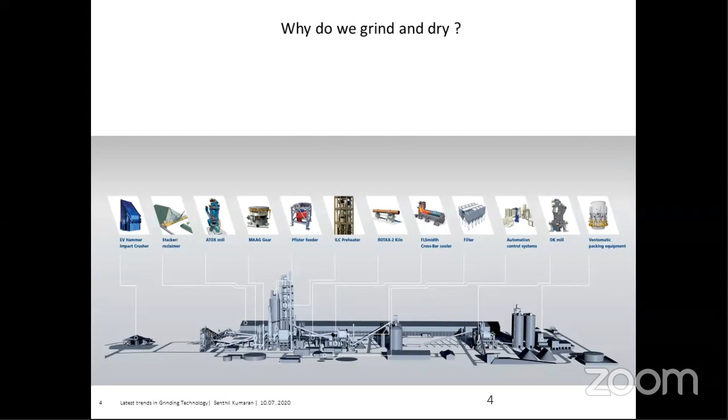When we want to optimize fuel consumption, we have to increase the surface area so that the process completes easily without much issues. To make perfect cement, we have to optimize our cost in terms of fuel consumption as well as power consumption.

That's the main reason why we are grinding and drying. Also for a streamlined process, these are all continuous processes. The feed should be homogenized and uniform enough so that fuel and power variations are streamlined. So to optimize that, we need to grind and dry it, for better heat transfer in the pyro system.

When we see the power split in the cement plant, only 33% of the power is spent in the pyro operation, 2% in the packing plant, and 2% for crushing. The major 63% is due to grinding.

That's why the grinding operation is so important, that we have to optimize it and choose a proper solution for the grinding.

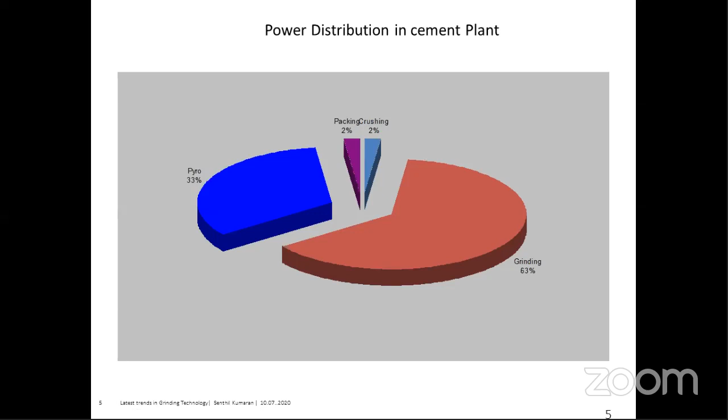When we see the crushing size reduction, it reduces the size from above 1 meter of rock up to 25 to 100 mm, but the power consumption is only 0.2 to 1 kilowatt hour per metric ton.

For raw grinding, the size reduction is 25 mm particle reduced to 85% less than 90 micron, with energy consumption around less than 20 kilowatt hour per metric ton. In finish grinding, the same 25 mm clinker is reduced to 95% less than 45 micron, where the power consumption is 26 to 45 kilowatt hour per metric ton.

Even though crushing reduces the major size band, from 1000 mm to 25 mm, the power consumption is less. But when we go to raw grinding, it consumes more power, and in finish grinding it consumes even more power.

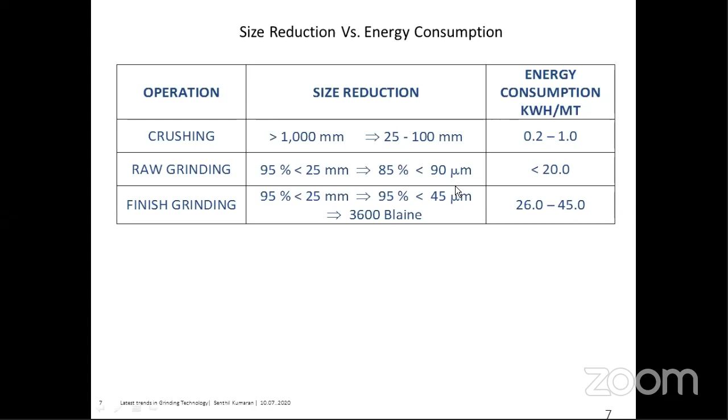When we see the principles of size reduction, they are impact, compression, attrition, and shear. These are the major four principles of size reduction.

With impact, it is a quick sharp blow which causes the stone to shatter. This is a typical industrial crusher, it works on the same principle. This particular piece of equipment is called single rotor blow bar crusher.

This works on the principle where it rotates at very high speed and passes the material. Above this there will be the impactors - the blow bars hit the material and it hits the impactor, reducing the size. Below this is called the grizzly bars, and based on this setting, the size reduces. So this is impact.

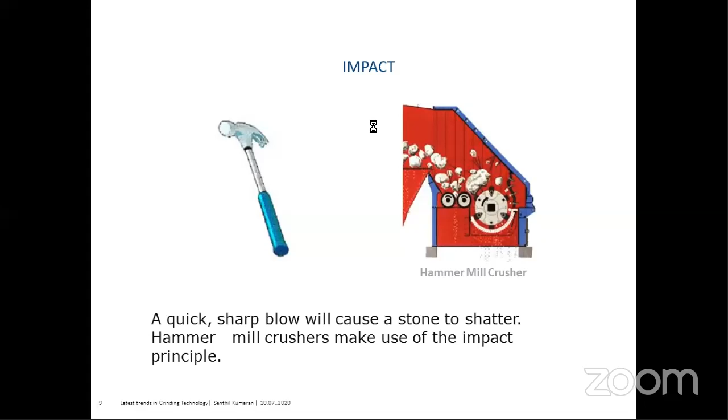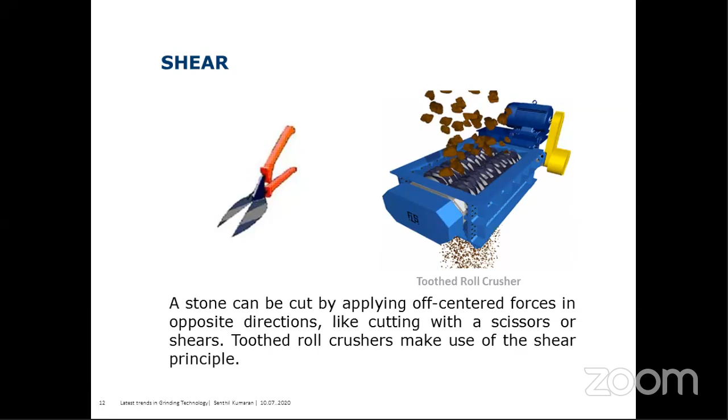Then the shear forces: stone can be cut by applying off-center forces in opposite directions. These two rollers with the sizing teeth rotate in opposite directions, acting like a crusher, like scissors or shears. So this toothed roll crusher makes use of the shear principle.

So in compression and impact, the wear and energy consumption will be lower, whereas in attrition the wear and energy consumption will be higher, because with impact the fineness cannot be achieved, but with attrition the fines can be achieved.

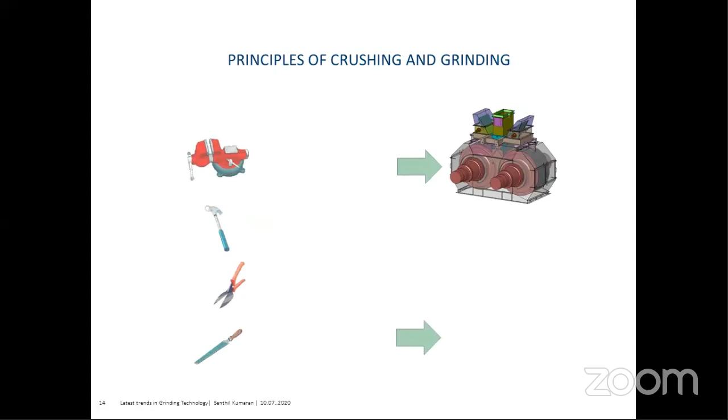So we'll see about three major equipments, or the three major machineries for grinding today. First is ball mill, then we'll discuss the vertical roller mill, and then the roller press. So at the top, this is the roller press.

You can see someone raised a hand. Yes, Mr. Vijay R. Hello. Hello. Am I audible? Yeah, you're audible. Yeah, I see someone has raised a hand. They may not be knowing, I think. Okay, shall I proceed? Yeah, you can proceed. Okay, fine.

So the common grinding machines in a cement plant, we'll see about these three: ball mill, vertical roller mill, and the hydraulic roller press. So we'll see about these three machines.

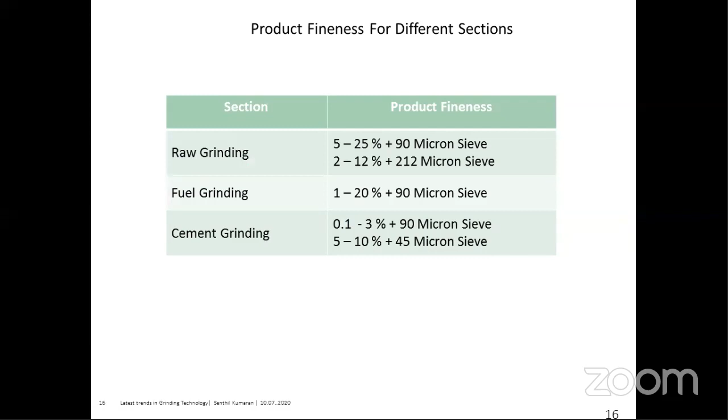So the grinding process: the first compartment grinds by impact, using higher size grinding media like 90, 80, 70, 60mm. These balls impact and break the particles by falling. The ball mill rotates, lifting the balls up to some level, and the lifted ball falls on the material, impacting and reducing its size. After some size reduction, it passes to the second compartment, where efficient grinding is done by attrition. The small size media, like 25 to 15mm, rub along with each other, and the material passes through attrition. This ultra fine or fine grinding occurs and grinds the material into a finer product.

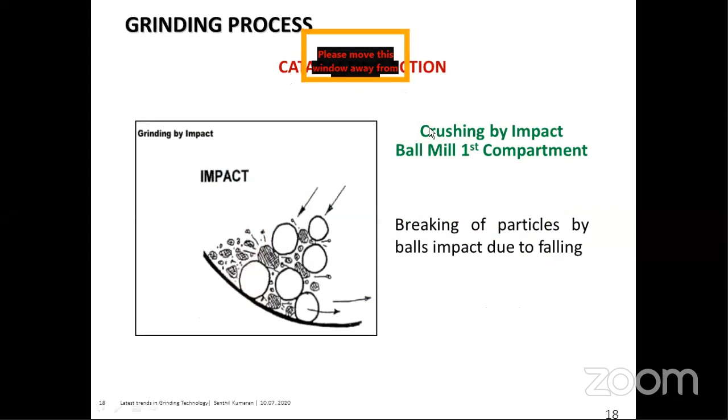So the energy transmitted in the balls is based on mass, ball sizes and specific weight, speed, movement, mill speed, filling, and liners. These are the major factors which will affect the grinding process.

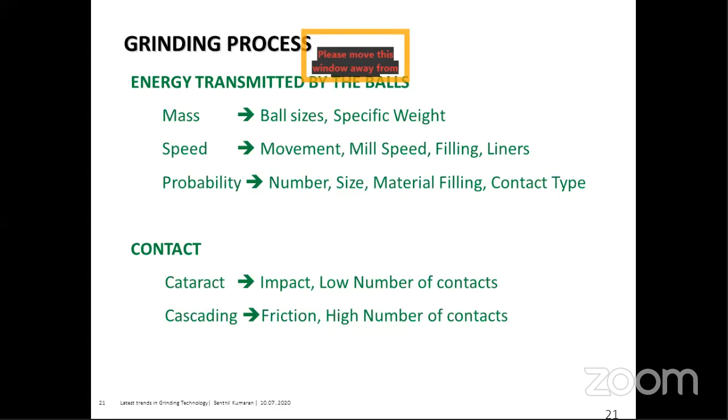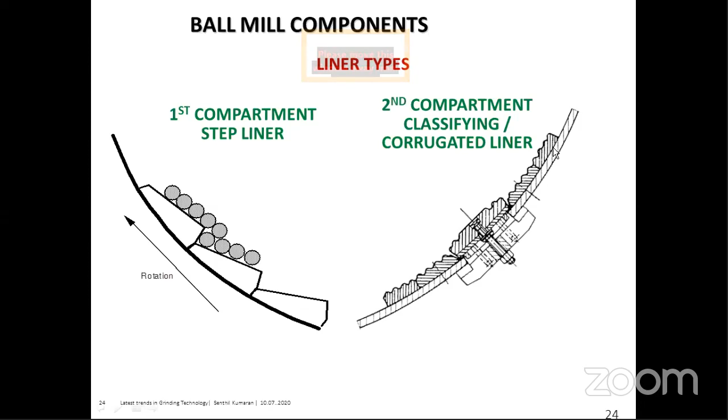So this is a typical ball mill, which we have seen already. This is the liner. The first compartment liners will be like stepped ones, and the second compartment will have corrugated liners. This is the central diaphragm and ventilation ring.

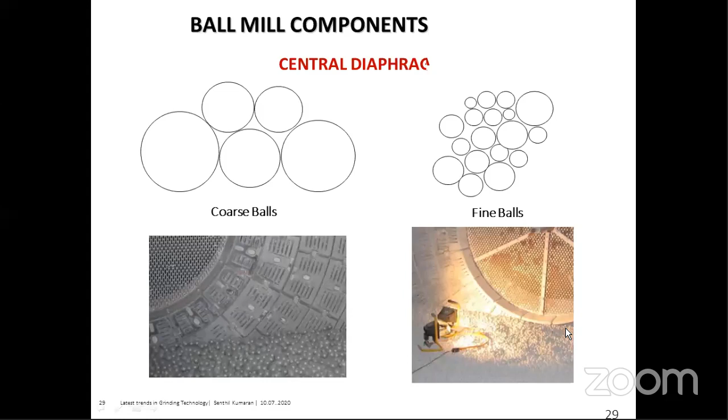Through this, the material passes to the second compartment. Here these are the coarse balls, and this is the fine balls. This is how it typically looks. We fill only up to 30% of the mill volume.

So we've discussed that critical speed is the speed where the centrifugal force at the mill lining is equal to the gravitational force. The critical speed equation is 42.3 divided by root of d naught. The normal mill speeds are 75 to 77% of the critical speed.

Can we see here, these are different values: on the y-axis, the ball charges in percentage of the mill volume - 10%, 20%, 30%, and 40%. On the x-axis, the movement of grinding media in tube mills: 20% of the critical speed, 40%, 60%, 70%, 80%, and 90%.

Then we'll see from the top: at lower filling level, 10%, at lower and lower critical speed, the ball won't even lift, so the grinding will not happen. At lower filling, we are not seeing any impact here, so lower filling is also not recommended.

At 20%, when we see between 70 to 80 where we target, the impact happens but not up to the mark. At 30%, we can see the mill rotates, the media lifts up, and it is effectively falling in the charge. So the effective grinding occurs in this area, between 70 to 80.

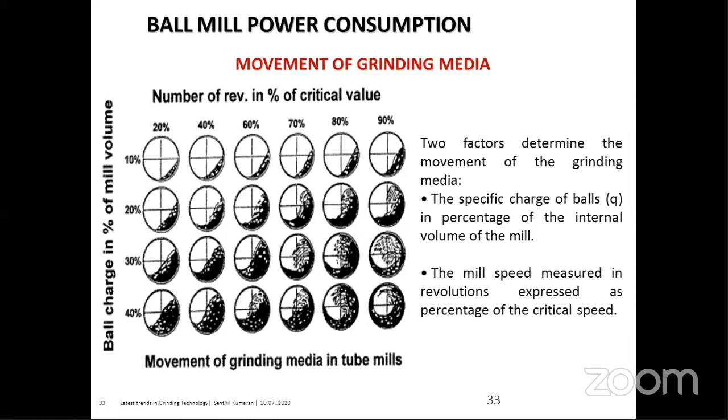So this is mill charge. Typically the charge will be 30% of the mills.

I can see someone else raise the hand, you can ask the question. Hello, is there any questions? If anybody wants to question, you can put it in the chat box. Okay, you can continue, let me continue.

So we'll see about this, the ball mill we have seen, and then we'll see about the vertical roller mill.

As here we can see this vertical mill, let me share a video of this vertical mill. This vertical mill is almost like our wet grinder. We'll have 3 rollers, and this is a center yoke, and it's a table. The table rotates, and due to the rotation of the table, the rollers also rotate, and it forms a bed between the table and the roller.

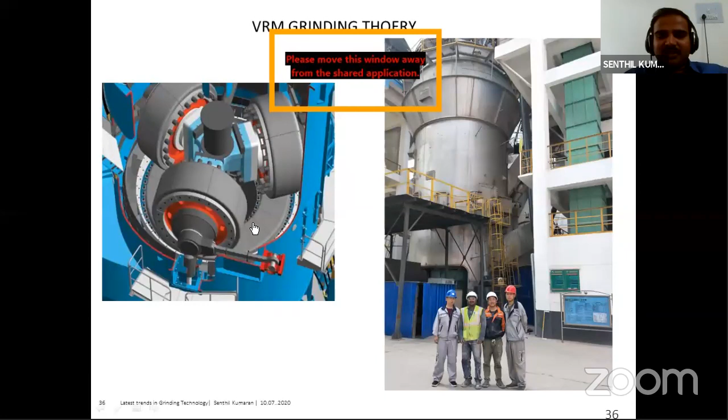Then the effective bed, we use water for stabilizing the bed, and then the bed stabilizes, we grind the final product. So this is a vertical roller mill, a typical mill. Maybe I can share an animated video on this.

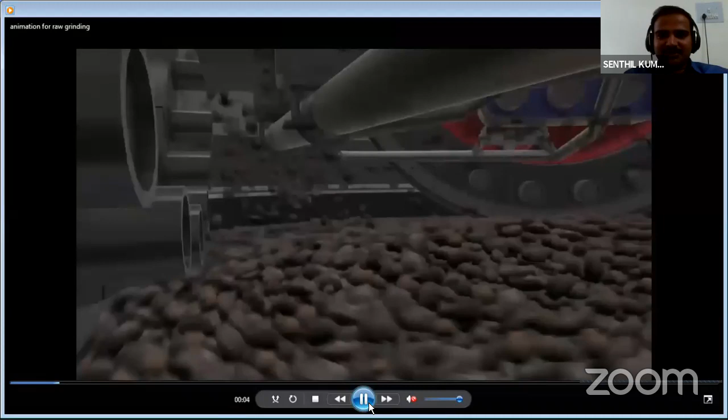So the feed enters inside the mill. This is a vertical mill, and this is the table, where the feed enters. This tube we're seeing is a water spray, which sprays water to stabilize the bed. Due to the rotation of the table, the rollers also rotate, and the material gets finely ground and lifted up. This is how the rotation works. The roller compresses the material and then grinds it.

What we see here is a dam ring. It acts like a dam and keeps the material bed up to this level so that a stable bed is maintained. Here, this is called the nozzle. The hot air passes through this, dries the material, and lifts it up, and it moves to the separator. We'll see about the separator soon.

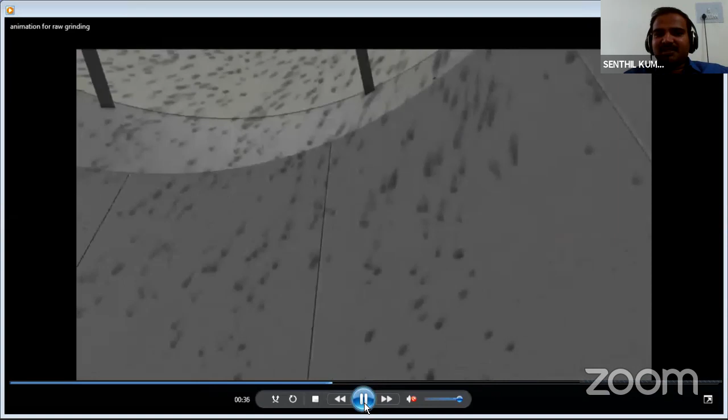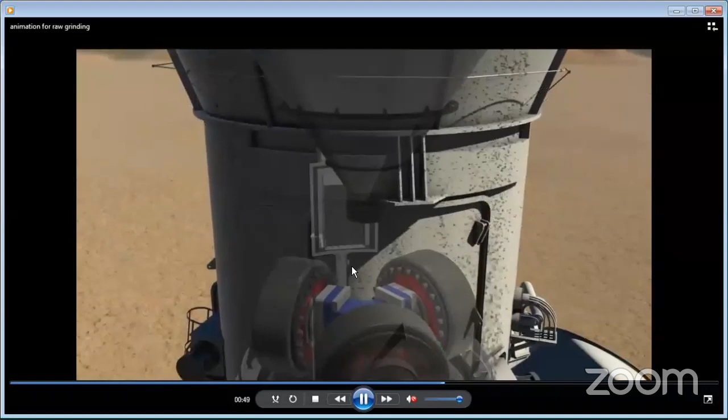So the finely ground material passes above and goes to the separator. This is the separator. What it does is, since the requirement is finely ground material, it separates the finely ground material above and collects it as product, and the coarse product is returned back due to this rotation action. The coarsely ground material comes back through this chute and recirculates again to the system, and gets ground finely again. So the material that escapes is recirculated back.

This is a belt conveyor, and this is a bucket elevator. Through the belt conveyor and the bucket elevator, it recirculates back, and the material gets recirculated back, and we can see that.

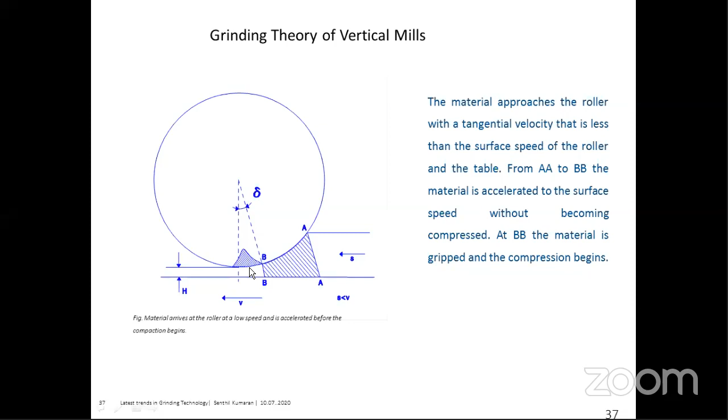So this is, imagine this as a roller, and this is a grinding bed. The H here refers to the bed. The roller rotates and the table rotates, and the material gets compressed between these rollers, and then the gripping and the compression begins.

So the grinding system design, what we consider is basically the material grindability, type of process, feed size, moisture content, and then the product fineness. We'll see one by one.

Grindability, we all know about the three laws of comminution: Kick's law, Rittinger's law, and Bond's law. So the grindability is based on the different materials. For example, limestone will have a different grindability, clinker will have a different grindability, and coal will have a different grindability, and other materials like iron ore or laterite or bauxite, any ores, will have a different grindability.

So the grindability determines, like if the material is hard to grind, then the capacity and the other wear materials will be chosen. The mills and the internals of the mills will be chosen based on the grindability. The capacity is all decided by the grindability process.

And then the type of process, in the sense like when the process will have different materials, when we have hot gas available or if hot gas is not available, and then the feed size, the moisture content. Moisture content is an important parameter. If the moisture is on the higher side, then we need higher hot air availability, more amount of hot air is required for that purpose. And if the moisture is lower, then we may not need that much hot air availability.

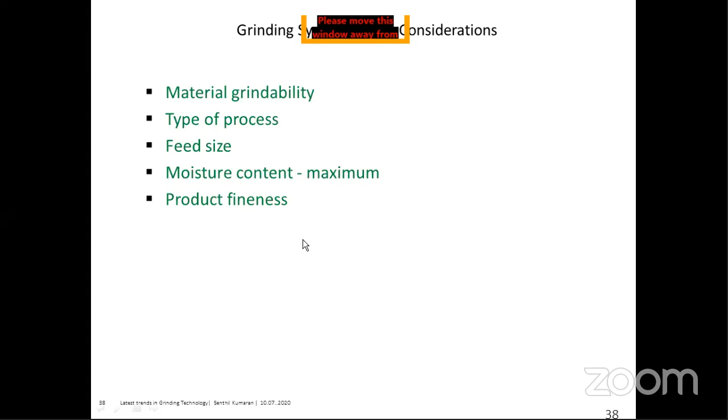And then the product fineness, what is the quality of the material, what is the fineness of the material we need. That defines the capacity and the requirement. So the specific power consumption is the mill power divided by the production. This is influenced by the material components, product fineness, grinding system, and equipment efficiency.

So when we come to this grinding system part, we have seen about the material components. If the material is hard to grind, then the grindability will be on the higher side. And then the product fineness.

If we grind the material finer, our power consumption will be on the higher side. So that also we know. And then what about the grinding system?

Like we have seen about the ball mills, and here we are seeing about the vertical roller mills. So these are different grinding systems. And then there is a roller press.

So they are three different types of grinding systems, wherein ball mill consumes much higher power than the vertical roller mill and the roller press. Because in the ball mill, the whole mill rotates, and it has to carry the weight of the balls and the material, and it generates more heat. Most of the energy spent for the ball mill is used for generating heat, which we may not need. So efficiency-wise, the ball mill is lower efficient than the vertical grinding.

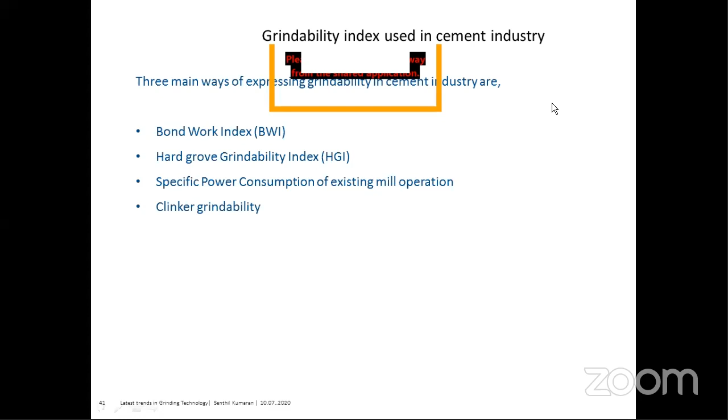The three main ways of expressing grindability in the cement industry are bond work index, Hardgrove grindability index, which we use mainly for coal grinding, and specific power consumption of existing mill operation, and clinker grindability.

So these are the main ways of expressing grindability. Is there any questions? Yeah, Prem Kumar has asked: how you will control heat loss in ball mill.

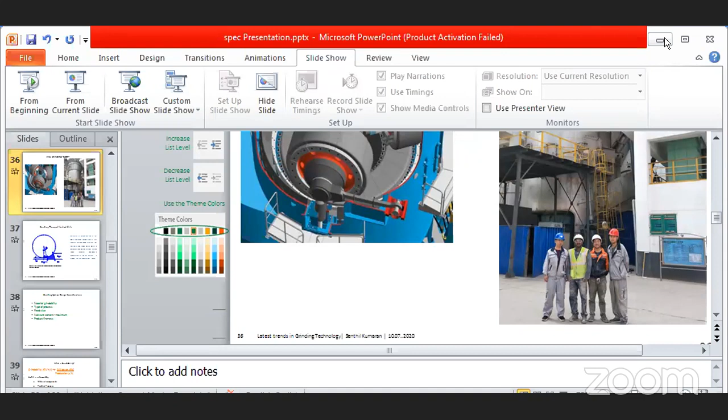Heat losses, basically, when we see about the ball mill, when we put more media, more heat will be generated. So the heat losses we can control, like we need to control the product temperature as well. What we do is add water spray to the system. We have an inlet as well as outlet water spray control.

So the water spray controls the temperature, and the losses can be controlled by adding appropriate grinding media sizes. Like in the first compartment, for example, we add 90 mm, 80 mm, 60 mm, 70 mm, and 4 or 5 sizes of grinding media. It depends on how much percentage you add to each. For example, we cannot add 100% 90 mm media. So we test the material basically.

For example, if it is limestone grinding, the limestone will have a certain grindability. We test this grindability and know the value. So we don't need that much impact force to the system. When we have the 90 mm media, if it keeps on hitting, only the impact will be there; the attrition will not be there.

So through proper size distribution of the medias, for example, I would like to add 23% of the 90 mm, and then 32% of the 70 mm, and the percentage continues like that. So the proper grinding media size distribution plays a major role in controlling the grinding heat losses, and also the material. When we have a moist material, we need heat in those cases. So it's a matter of optimizing the hot air or the heat generation due to the grinding media. That's how it's practically done.

For example, one more question: tell us about centerless grinding and its advancement. Come again, madam? Tell us about centerless grinding and its advancement. Centralized in the sense? I'm not getting it clear. Chidambaram has asked this question. Can you define the question more, Chidambaram?

Chidambaram is there. Okay, can continue, Mr. Senthil Kumaran. We'll come to the question later.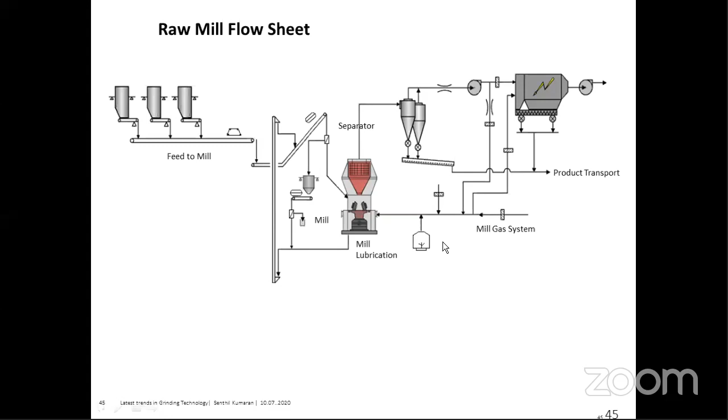So this system is a typical vertical roller mill. For drying, it can grind and dry up to max 24%. For size reduction, it can reduce up to 200 mm to 15% retention on 90 micron. This is more energy efficient. Capacity can be as high as 750 metric tons per hour, and in India, one place we have 900 metric tons per hour mills also. It can dry the material, and it's a simple layout with separator integral to the mill.

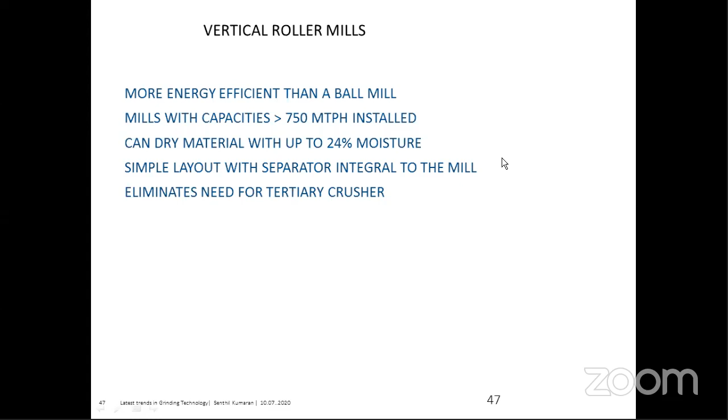So this is a typical raw grinding system, which we have seen already. This is the mill internal.

Maybe I can show you the actual mill. Just a minute, I can show the video of an actual mill.

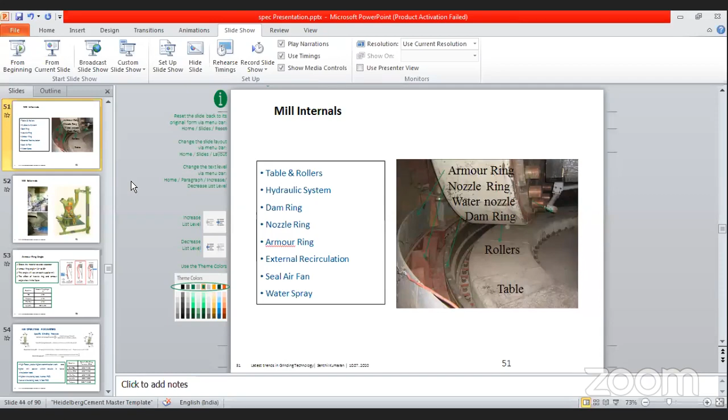Can you able to see the video now? Yeah, we can able to see the video. Okay, this is an actual video of a mill or mill circuit, vertical mill.

This is an empty mill. This is a table, and this is the water arrangement for stabilizing the mill, and this is a dam ring. This is actual video taken during trial purpose. The roller will not rotate at this time because there is no contact, it will be slightly lifted up. When the material enters, it acts to make a bed between the table and the roller, and then the roller starts rolling also. So this is an actual video of the mill system.

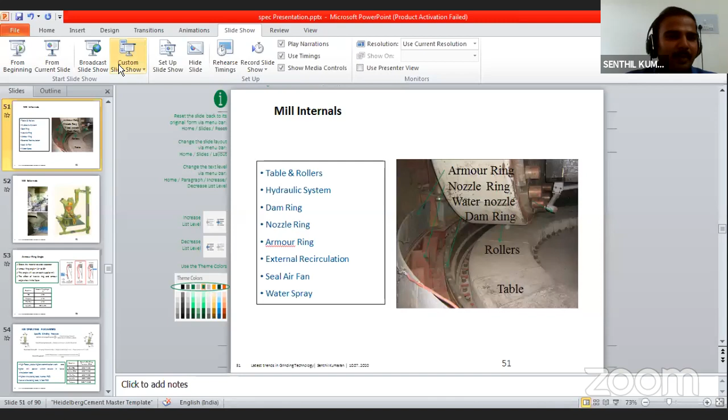So then we'll go back to the presentation. Can you see the presentation now? Yeah, I can see the presentation. Yeah, this is the table.

This is a table, roller, water lines. This is air guide cone, and then these are all the nozzle rings. So this is the internal of the mill. This is the mill external. This is the recirculation system of the mill.

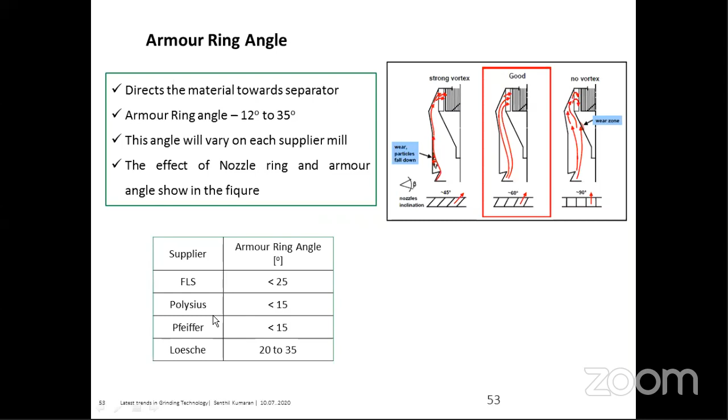So this is the dam ring. The dam ring height defines how this will be taken as a trial or the optimizing parameters. We decide the size of the dam ring based on the grinding system. If the dam ring height is too high, then the bed depth increases, leading to inefficient grinding, and it increases the power consumption as well.

If we keep the dam ring too low, then we get low bed depth, which causes high vibration and high external recirculating load. As we know, this looks like our wet grinder. If we have more material in the system, or if we don't add sufficient water, and we keep rotating, what will happen? The wet grinder will start to jump due to vibrations, right? So it's the same here.

This is such a massive piece of equipment and machinery. So when we don't maintain any parameter properly, for example, if the bed is not stable, if we're not pouring water well, if the material isn't coming properly, or if there are issues with the roller or the table, ultimately it starts to vibrate a lot. So we install vibration sensors to detect this, and then we control the vibrations.

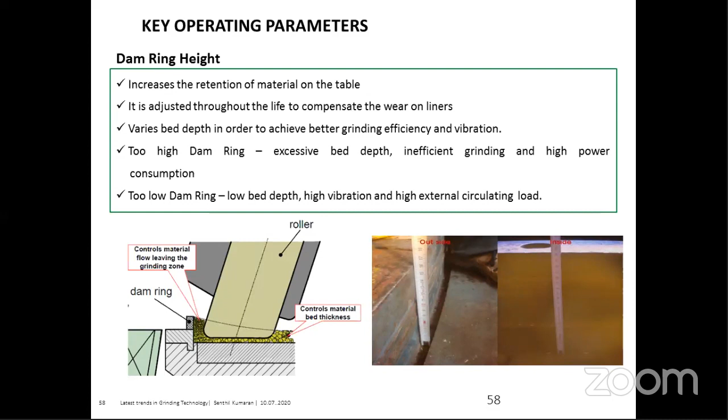So this is how the mill operation works. The new feed enters through the mill and goes to the table. It grinds well, and then some particles, 10 to 25% of the material, escape above the dam ring and go to recirculation. The finely ground material goes to the separator, and the fine product goes to the cyclones, while the coarse product returns back for recirculation. So this is how the mill operation is.

We have seen this in the video as well.

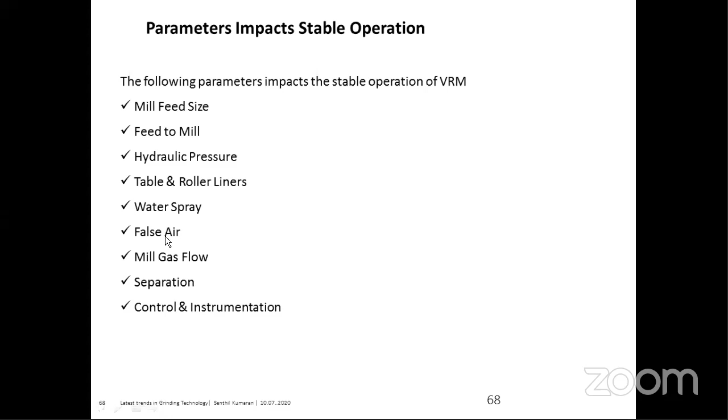So the stable operation parameters are feed size, feed to mill, hydraulic pressure, liners, water spray, false air, gas flow, separation, and instrumentation. Then it is the coal grinding VRM.

We grind the raw material, which is limestone powder. Limestone powder is typically an inert material, so it's not an issue. For coal grinding, when we grind the coal finer and it heats up too much, the chances of explosion are high. So the basic difference between the coal grinding VRM and the raw grinding VRM is that safety precautions will be much more in the coal grinding system.

So we have to ensure the safety of the system as well. That's more important. For safety, we monitor temperature and CO levels more closely in the system, and we regulate it with inert dust materials, following more precautions in the grinding system. Also, there won't be any external recirculation, and only a single fan will be there.

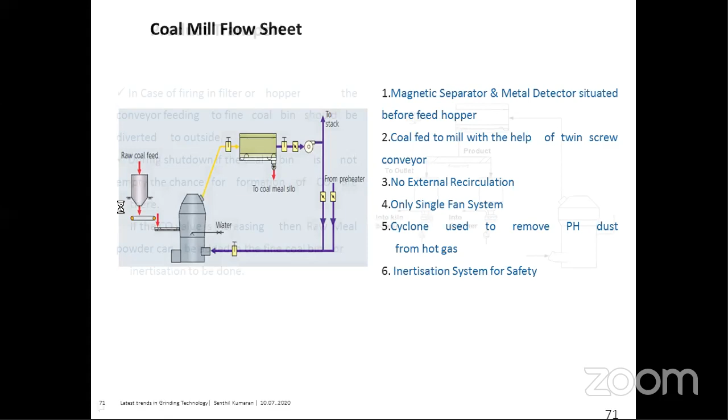So this is a basic difference between the raw mill and the coal mill. This covers the vertical mills. Due to time constraint, I'll move on.

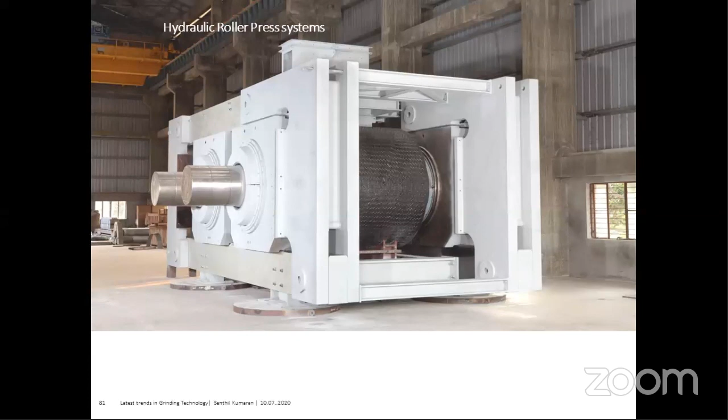Now we look at the third grinding system, the hydraulic roller press systems. This is a view of a hydraulic roller press system. The operating principle is that comminution happens between the two rollers, which rotate in different directions.

The material is fed between them, and through this gap, the material gets compressed and forms a bed inside, and the roller press forms a cake. So we won't get a fine product directly outside the roller press; the cake forms below, and later it is deagglomerated by deagglomerators.

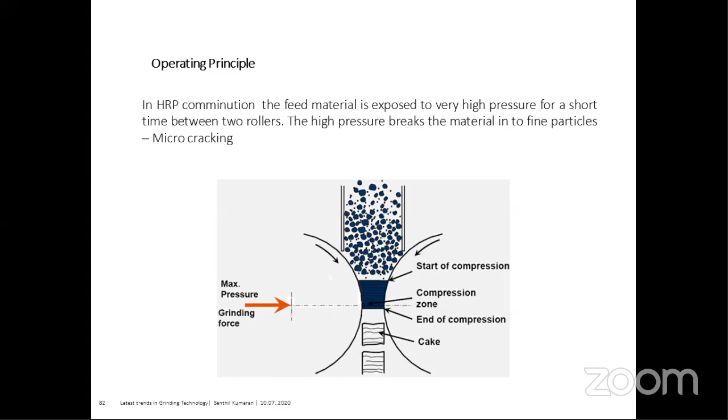We have deagglomerators installed in the system that deagglomerate the material, and then it goes to the separator where it separates.

In these hydraulic roller press systems, hydraulic force is applied between the rollers, which starts compression and breaks the material into fine particles through micro-cracking. It forms micro-cracks and reduces the particle sizes.

The typical specific grinding force is 600 to 800 for the VRM, 1000 to 1100 for cement grinding, and for the HRP, the hydraulic roller press, it is 5500 to 6600. So these are different circuits.

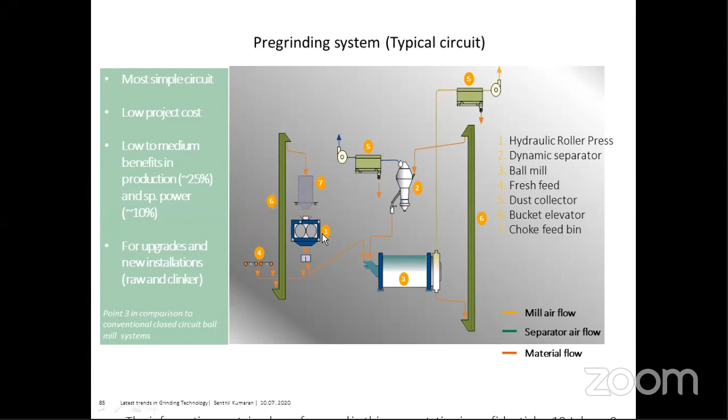There are three types of circuits for the roller press. First is the pre-grinder system, which is a single pass. It reduces the size and then goes to the typical ball mill, forming a typical circuit. It is simple, and mainly used for upgrading an existing ball mill system.

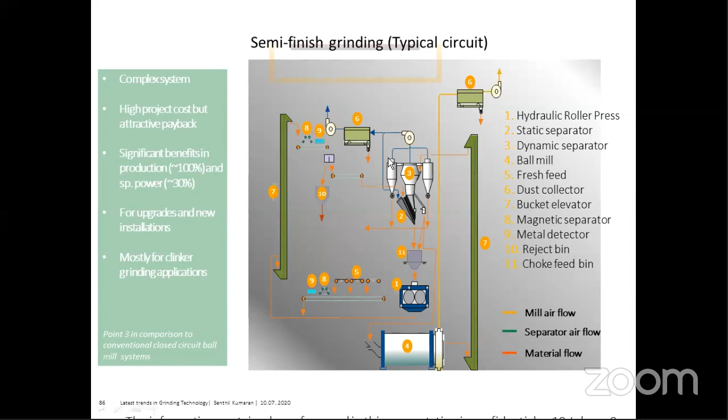Then there's the semi-finish grinding system. This is also an upgrade, and the payback is higher. The roller press has a separate circulation system, and the material goes through the system again, with a two-stage separator here.

So this is a semi-finish grinding circuit, and then there's finished grinding, where there won't be any ball mill in the system. The only grinding machine is the roller press, and it has lower power consumption as well.

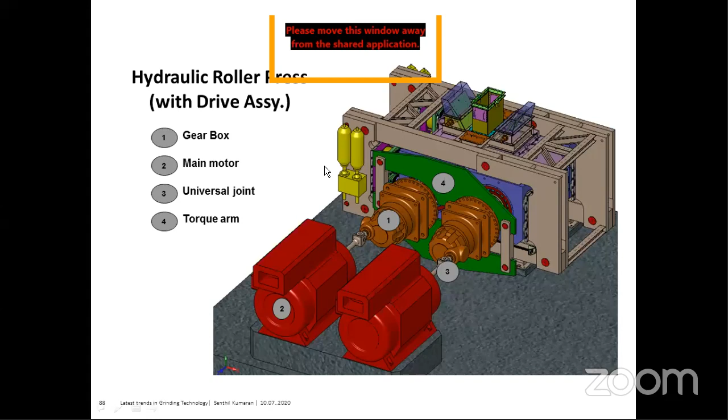So this is a hydraulic roller press system. This is a 3D view of it. This is called the cheek plate. Just like our cheeks, it helps prevent material from bypassing the system. Since we are applying high pressure between the rollers, the chances of material escaping is more. So this cheek plate acts like our cheeks, holding the material and making the grinding more efficient.

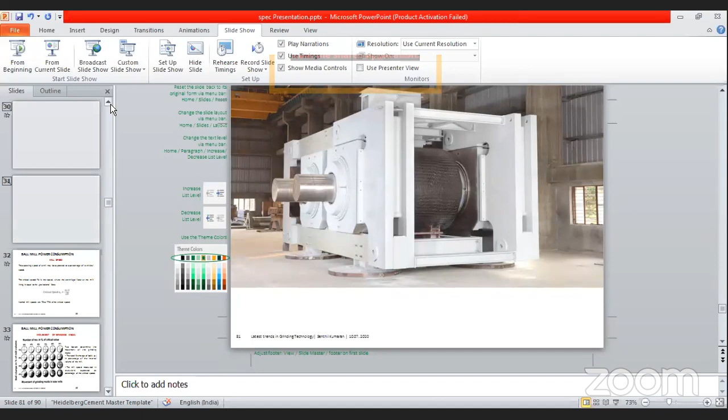Then the civil cost, other than the machinery cost, also plays a major role, along with the operating cost. The civil cost for the ball mill is again on the lower side, but the vertical roller mill and the hydraulic roller press are on the higher side. The operating cost of the ball mill is much higher due to higher power consumption. The vertical roller mill and the hydraulic roller press will be on par in operating cost.

We need the same performance in all three machines, so there won't be any compromise on the final product quality. The major advantage of the roller press is that it doesn't need any water spray system for efficient grinding, whereas the ball mill needs a water spray system for cooling, and the vertical roller mill needs water spray for stabilizing the bed. For the hydraulic roller press, water spray is not required. So in Gulf regions where there is more water scarcity, they prefer hydraulic roller press systems over vertical roller mills. There are also layout constraints and many other factors that play a major role in choosing between these three machines.

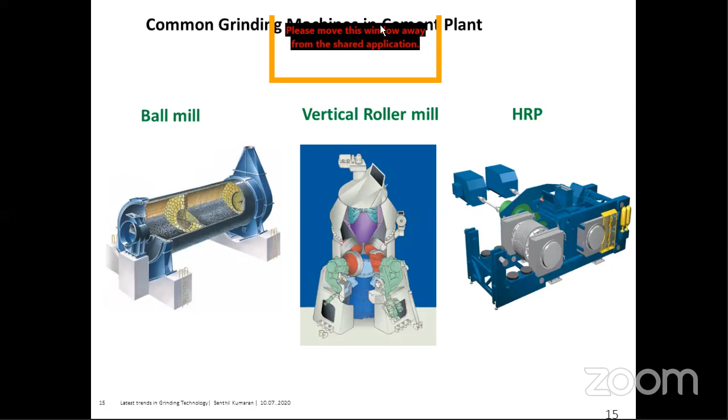Actually, they have asked: if there is any surface deterioration on the roller, if it occurs, how to handle that situation, and how it affects the grinding efficiency. Yes, it's a good question, of course.

Wear and tear is common in all three machineries. For example, in ball mills, the wear materials are the grinding media and the liners. If I put a 90 mm media inside the mill, after some time it will reduce to 80 mm media. Then the 80 mm media will become 70 mm, 70 becomes 60, 60 becomes 50. The 50 will not perform, and the 90 has to do the impact job, but that will not happen.

So what we do based on the wear is top up the media, adding more grinding media to the system. For example, I measure the wear as 40 grams per ton of material, like raw material or cement. I know this value based on experience and several measurements. So I know after one month, two, or three months, the performance will not be the same as a new one. I know the established value as the wear rate.

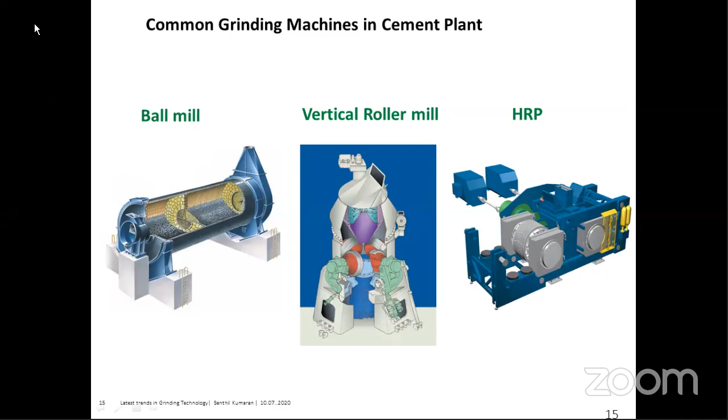Madam, is there any other question? Question is, other than the feed rate constant, is there any other source to increase efficiency? I'm not getting it, madam. Other than the feed rate constant, any other source to increase the ball mill efficiency?

There are other ways as well. For example, in ball mill operations, it's not the feed actually, it's the media. Media is one part, and the other part is that sometimes when moisture is more, the material gets coated over the grinding media, and that reduces the grinding efficiency. So that is one part. In recent days, people have started using grinding aids as well, like glycol.

There are different products available in the market nowadays for improving the grinding efficiencies. So ethylene glycol products are commonly termed as grinding aids. People add the grinding aid to the system, and it improves the grindability and the fineness of the product, so it also plays a major role.

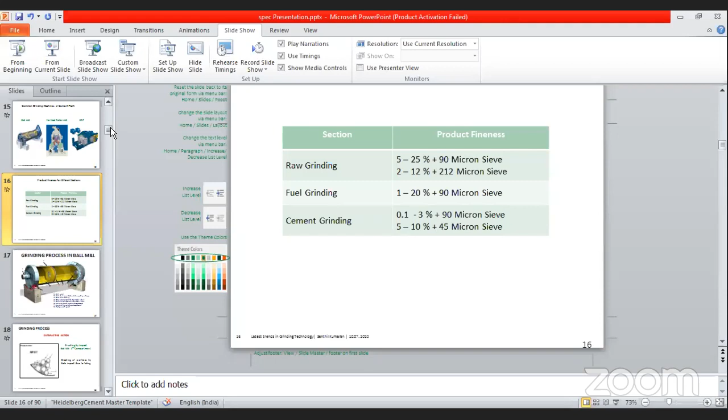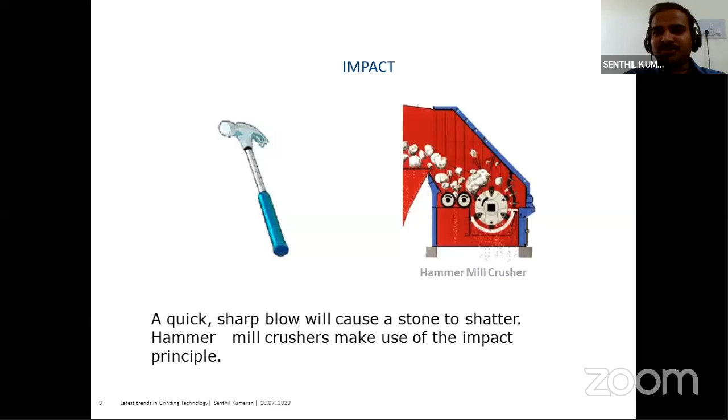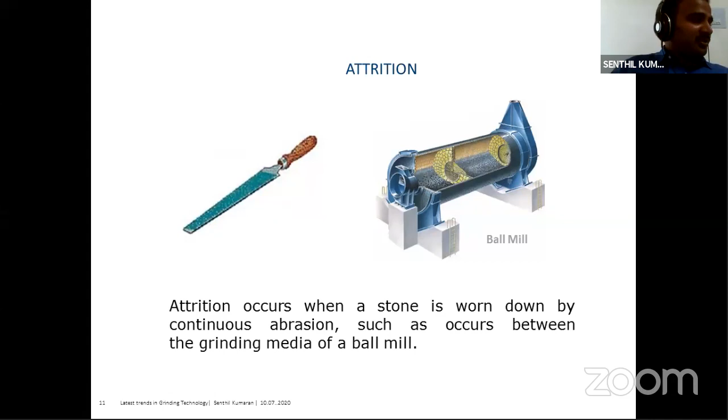Any other questions, madam? Is there any recently developed grinding equipment available?

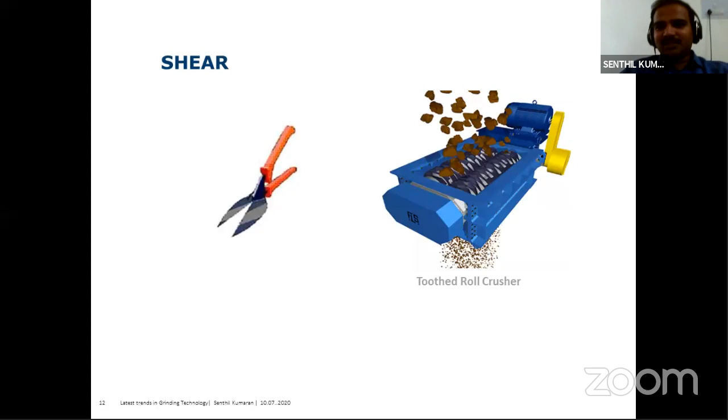Recently, there are other equipment also available, but performance-wise. There are equipments called Horomills, which have a single roller, and it grinds the material, but the performance has to be compared. Even though ball mills, roller presses, and vertical roller mills are all established equipment, the recent trend is to optimize the cost of equipment and improve performance, so it can be sustained in the market and serve its purpose.

This is our typical ball mill. At the end, we can see there is a gear arrangement - this is a girth gear arrangement. There will be a shaft on the side, and the rotation is done through the side drives - this is called side drive. There is another variation in the mill where, in the center of the ball mill, there will be a shaft attached along with the gearbox.

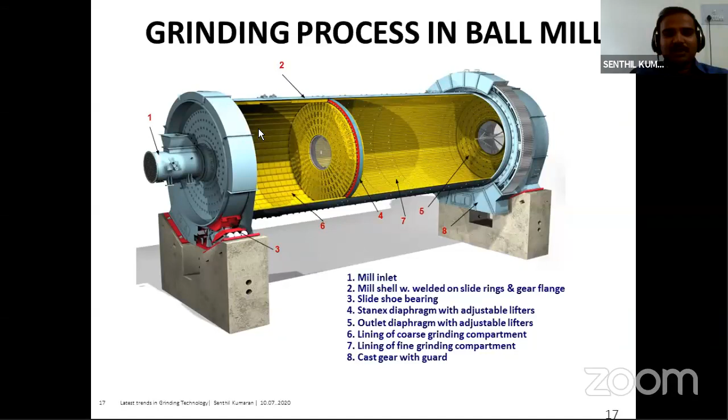Even the vertical mills have a lot of variations. For example, here we have seen a flat bottom. I will show you that.

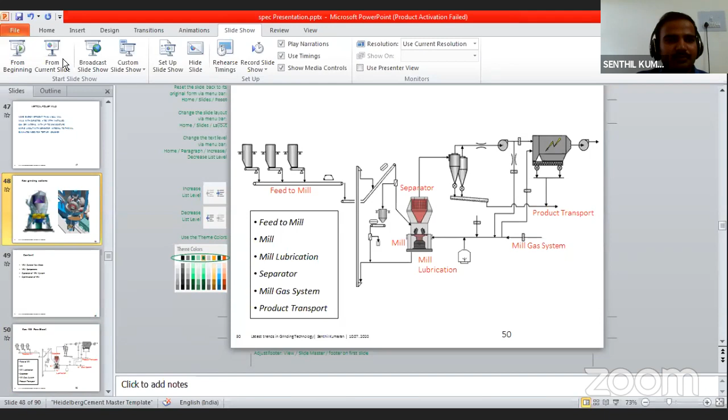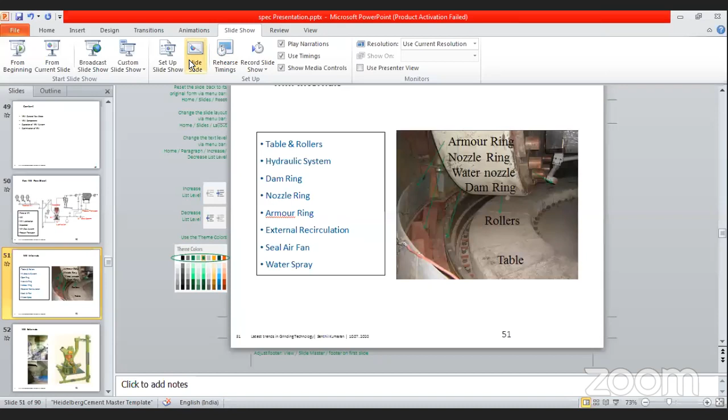Here we are seeing the liner of the table and the roller. They are both flat. But other competitors and suppliers do things differently, using different types of liners, maybe bowl type liners, bowl type grooved rollers, so it won't be a rectangular shape. People use concave shaped rollers. So for improving grinding efficiencies, they change the concepts, launch new products, and other variations are also done.

Here we are seeing about 3 rollers. In industry, there are even 6 rollers available for this. To serve the purpose, the performance, power consumption, and production have to be improved, so new products and upgrades were launched.

Any other question, madam? Any other queries from the participants? I can continue. Are we on time frame, madam, or... Hello? Hello. Hello, yeah, can you hear me? Yeah, almost 2 hours over. Okay, if you finish it fast, it will be better. Maybe we can close it now, and we'll open for the queries.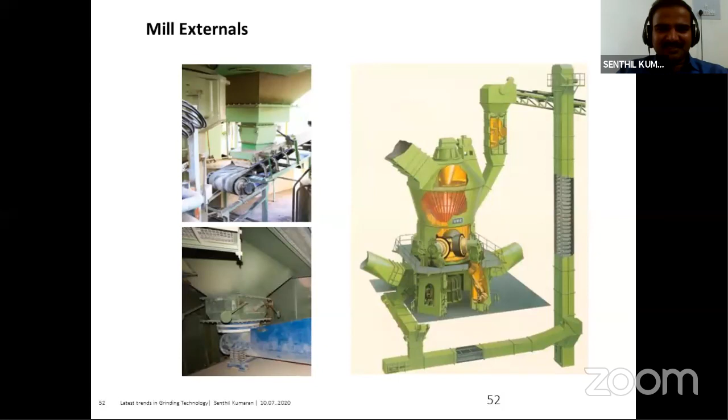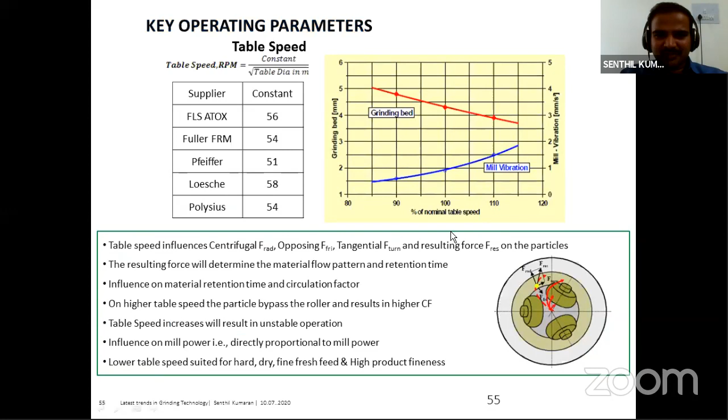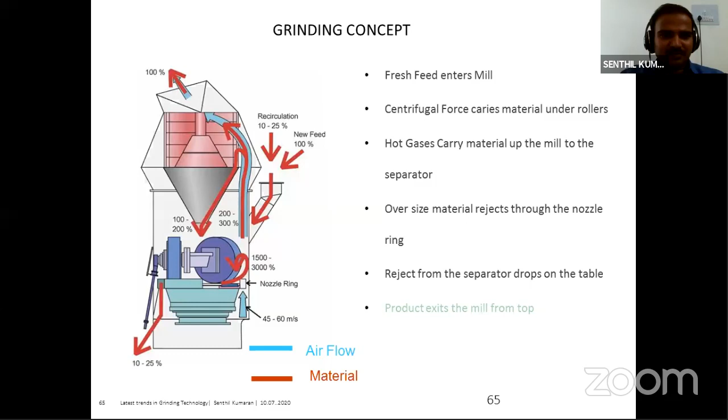Any other queries? What is meant by SGM? SG? M. SGI or HGI? SGM, where is it mentioned? I'll put it in the chat box. Are you talking about this one or? SGM. SGM, yeah, in which slide is it mentioned? Participant, can you mention which slide and can you mention it? Participant has asked the question. Maybe it is regarding some slag grinding mill. They have asked actually. We will find it.

Okay, let's not waste time. Next question is, how is the noise controlled?

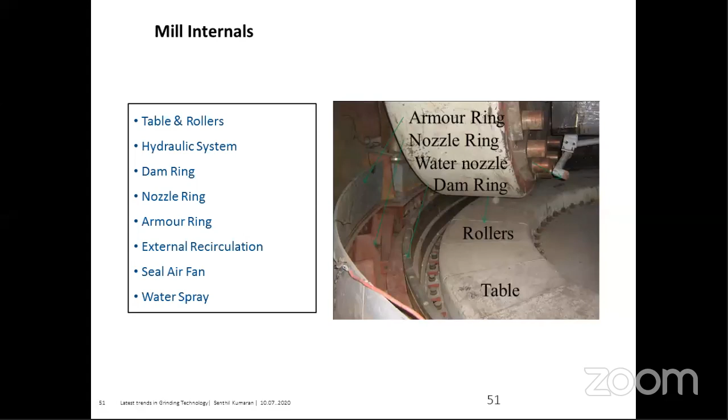Noise is basically like the ball mill will have a hell lot of noise, and through the noise only we control the material actually. So for the ball mill, the first compartment will have higher noise. So what we do is we have a phone-like noise meter. If there is more noise, it means the material is filled empty, the mill is running empty. So we have automatic feed control. If the noise level is more, we increase the feed rate. If the noise level is low, we reduce the feed rate. So noise will be more in the ball mill.

For the vertical mill, typically we won't hear much noise if it is running in stable and normal conditions. If there are any abnormalities, like any roller or liners broke down, then there will be noise. If there is any abnormal noise, we stop the mill immediately, go for inspection and rectification. But the ball mill, we basically operate with the noise, and like any other mill or operation, we have to protect ourselves from the noise.

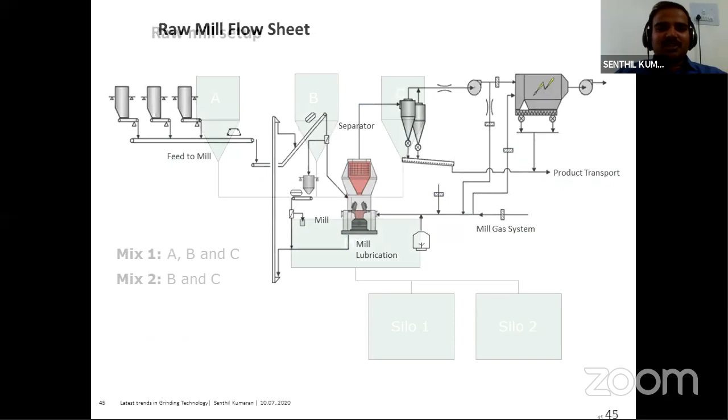The centerless grinding is normally called central drive grinding. Typically the old type mills were driven by a girth gear, through which the mill rotates. This is also at least 15 to 20 years old. In the central drive, the mill has a center shaft connected to a gearbox, and then the motor is connected to it and rotates it.

The advancement and the advantage is basically about the girth gear. When we look at the cost, maintenance, and operation of the mill, the girth gear has more impact, and its cost is on the higher side. We have to lubricate the girth gear all the time, and if there's any crack or damage in it, the whole plant or mill has to stop for months together. So people don't like to keep a spare since it's very high cost equipment. The central drive has that advantage over this.

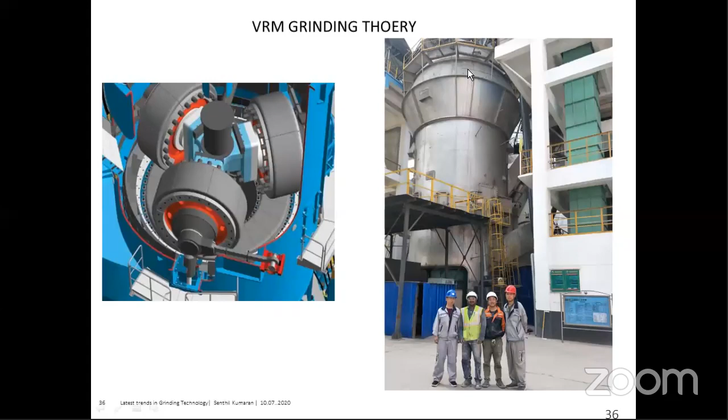Say something about the storage tanks of cement - what's special in it? Yes, that's another interesting question. Maybe I can show the pictures of that.

The cement, not only cement but even the fine ground material - whether raw material, coal, or cement - is stored inside silos. Let me show the pictures. These are all specially designed equipments because we need to homogenize the material and store it for a longer time to serve a lot of purposes.

First, the purpose of silos is storage. For example, if I want maintenance on the mill, I cannot stop the other process for that purpose, so I need sufficient quantity of material stored. That's storage - one part. The material has to be stored inside the silos and homogenized as well, and then it has to deliver the material too. So it should serve three purposes: storage, homogenization, and flowing of material. Let me take one more presentation of that.

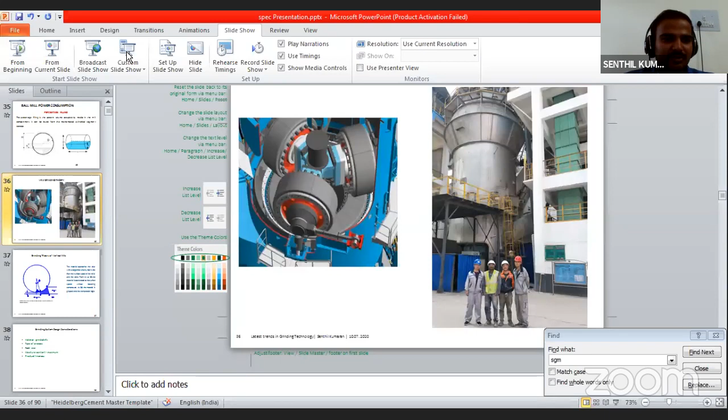We maintain sufficient draft so the material will not form a cake inside the silo - it's continuously aerated. These are all specially aerated designs. For the coal mill, the setup is smaller because of the ignition properties of the coal, so we have either nitrogen purging or CO2 purging. In case ignition occurs, we purge with nitrogen or CO2 so that the fire or ignition source can be controlled.

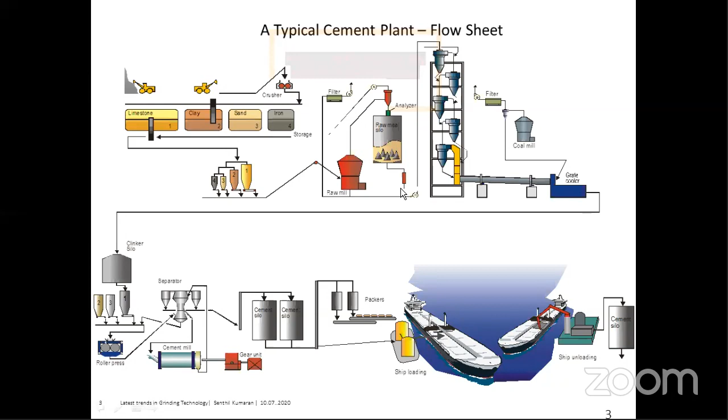Hello. Yes, sir. Dear Senthil sir, thank you so much. You've given a wonderful presentation; it was more interesting as well as more informative, right? Really, I'm very wondered about your presentation. The way of your presentation is also really very enjoyable, and our students also asked a lot of questions, which means you have impressed them, right? So really, thank you very much for your presentation, and also for immediately accepting our invitation. We're also expecting the same kind of support from you in future, sir. Anytime, sir. Thank you so much. All the very best, man. Thank you, sir. Thank you.

Okay, sir, I'm doing it.